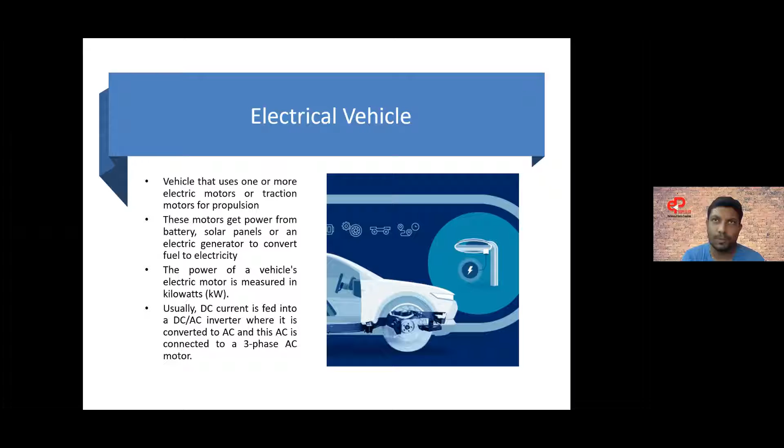Advantages of electrical vehicles over conventional vehicles: we all know that the initial cost is very high in EV vehicles, but the running and maintenance cost is very low compared to ordinary IC engine based vehicles. They are pollution free, because we have no IC engine carbon CO2 emission, so pollution free. That's the main advantage of going for EV applications.

We are able to integrate with renewable energy sources - battery is possible, solar panel is also possible. That's a benefit of EV. Eco-friendly materials - that means reusable materials we are able to use in EV vehicles. That's the advantage, it's eco-friendly. Health benefits - no pollution, no CO2. That's a benefit to society as well.

Safety improvements - compared to IC based vehicles, we are able to integrate more sensors in EV applications. That's a major advantage of EV vehicles, these safety improvements, for our energy society.

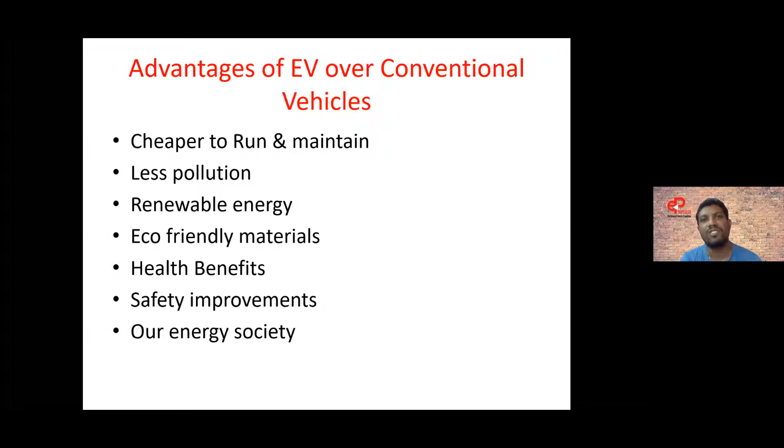We know that petrol price today is approximately 97 rupees. Maybe in the next one week it will reach 100 rupees or more. So our country is still having a major issue with fuel crisis. So if you go with EV applications, there are benefits for our energy society, meaning economic benefits are also there. That's what we mean by energy society.

This is the current status of EV all over the world. If you want to know about the global EV status, you can refer to the IEA, International Energy Agency, website. This is the first chart - you see electric vehicles all over the world in different transportation modes for different countries.

This shows how it's growing across different countries - China, Europe, United States are the major contributors. Out of all countries, China is the major contributor. You see the blue one, that's China, they are contributing more. They are the heart of EV vehicles because even today, 90% of motors used in EV applications all over the world are bought from China, because their raw materials are available at low cost.

Production cost and labor cost are also very low there, so we are able to get low cost motors. Then here you see another chart of how many cars were sold in 2020. Here in China, battery operated vehicles and plug-in hybrid electric vehicles are occupying more space in this chart in 2020, still continuously increasing compared to other countries. So from this chart itself, you know China is the major contributor for electric vehicles.

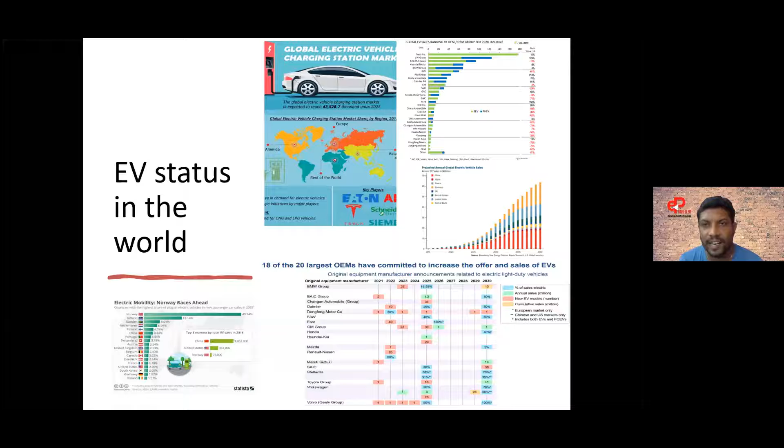This is the last chart - out of all countries, Norway right now is using the most electric vehicles in their country. Compared to Iceland, Sweden, China and other countries, even though their production and population is less, they are using nearly 49% electric vehicles on their roadsides.

The familiar three-wheeler EV in India - Ape is one of the major three-wheeler OEMs, they are producing electric vehicle based three-wheelers.

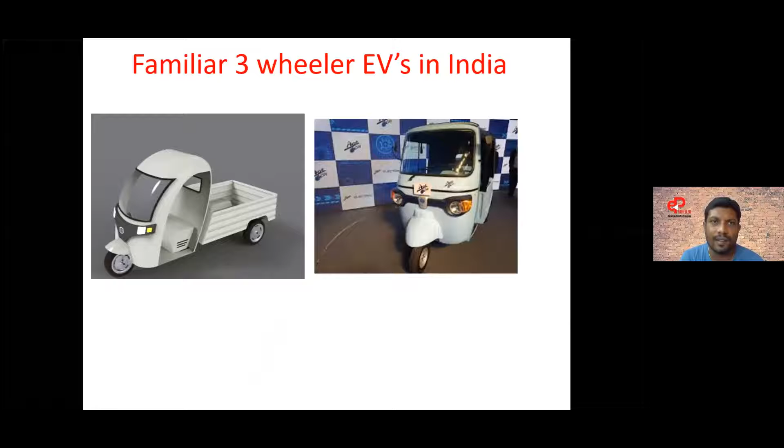This is the electrical vehicle status in India up to today morning. If you go and visit a particular website, I will give that link, there you are able to see how many vehicles are sold every day across different states.

Right now 75,000 vehicles sold all over India. In Tamil Nadu, 11,592 vehicles already available. Karnataka, 17,021 vehicles already sold. Kerala, 1,712. The remaining states have different numbers based on their original registration. Because however many vehicles are sold daily, they register on this website, so automatically you are able to know the counts.

Here you see this many vehicles sold, fuel saved in liters per day, carbon dioxide reduction in kilograms, every day and every year. This is the benefit we are able to see on this website.

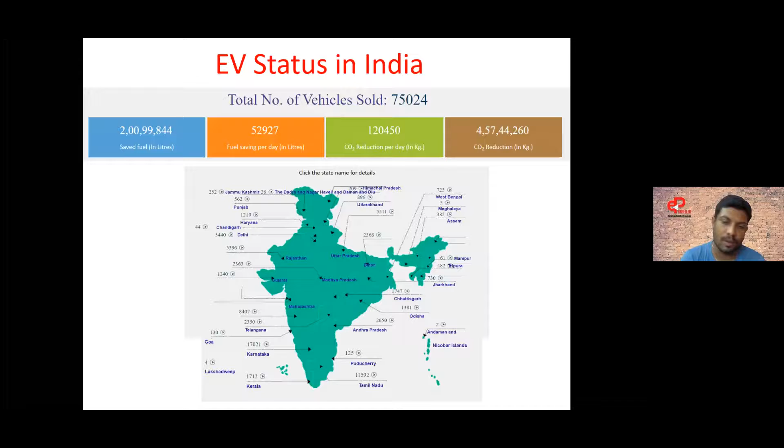So for current EV status in India, different states are giving tax benefits. This is the IC engine based vehicle tax, and this is the electrical vehicle tax. In Delhi, there is no tax for electrical vehicles, but IC engines get an 8% tax. But in Tamil Nadu, it's 4% tax for electrical vehicles, 12% tax for IC engine based vehicles.

This is the comparison if you go with electrical vehicle versus petrol engine. In electrical vehicles we have two versions: lithium-ion based and lead acid based vehicles. Compared to petrol, here we have more benefits.

Ex-showroom price is high, but you see, for 50 km per day we are able to run. Here 1 liter of petrol is required, here 1.5 units are required. Cost here is 11 rupees, here 60 rupees... now it's 96 rupees.

Running for a 5-year product future prediction, 75,000 km from here to here. You see savings in 5 years of nearly this much amount. We are spending nearly 1,75,000, here 1,13,000, here 91,000. Carbon dioxide is reduced in both electrical cases, but with petrol it is not possible.

If you want to know brief details about the EV market in India, refer to these websites: FAME2, SMEV - Society of Manufacturers of Electrical Vehicles, and ARAI India. ARAI India is our government authorized website. FAME2, if you want to know what standards and testing procedures are used in India, refer to FAME2 - everything is given there.

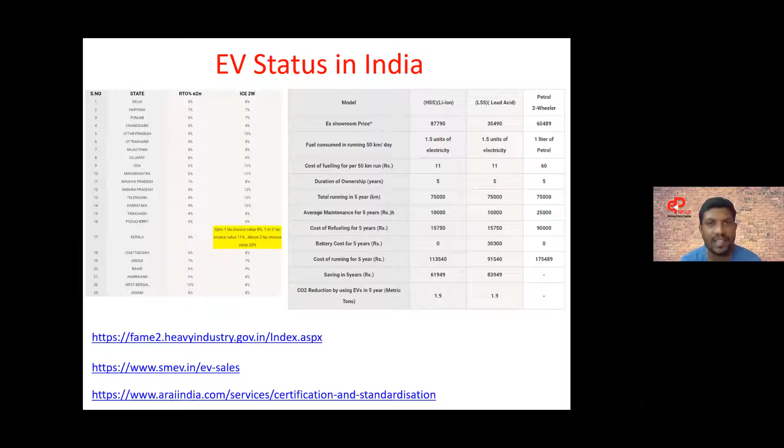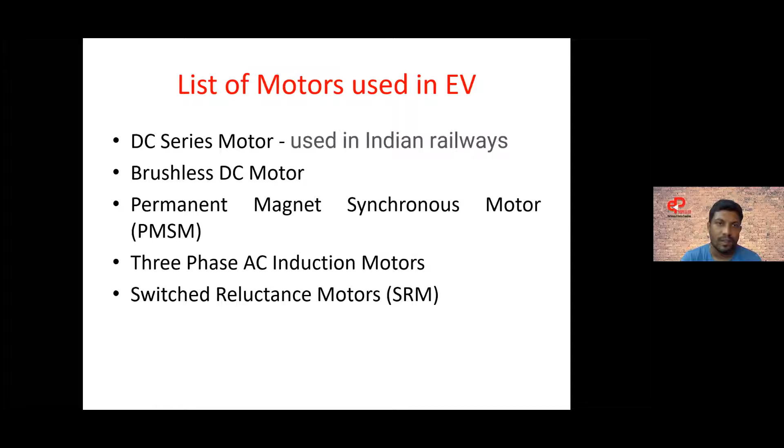Then I'll go with another 4 motors: brushless DC motor, PMSM, 3-phase AC induction motor, and SRM, switched reluctance motor. We are going to discuss briefly about these 4 motors. I am talking only from an industrial point of view, not about basic characteristics or other applications.

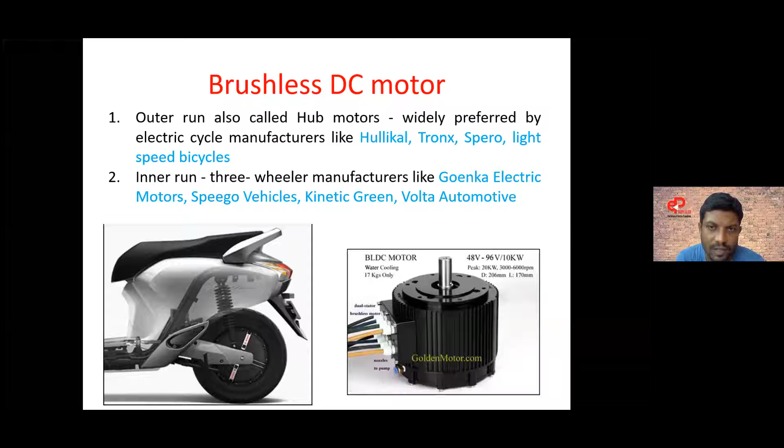Inner run motor means rotor inside, stator outside. In the outer run, rotor is outside, stator is inside. That's why it's called inner and outer run rotor. This inner run rotor is suitable for 3-wheeler applications. Goenka electric motors, Piaggio, Ape, they are using this type of BLDC motor. The problem with BLDC motor is it's suitable only for low power, low speed applications, not suitable for high power applications.

Then permanent magnet synchronous motor. The difference between PMSM and brushless DC motor: here air gap flux linkage is sinusoidal in nature, but in BLDC it is trapezoidal in nature. Both machines have the same construction, but because of their motor winding distribution, this motor has sinusoidal back EMF in the air gap. That's the advantage of this one.

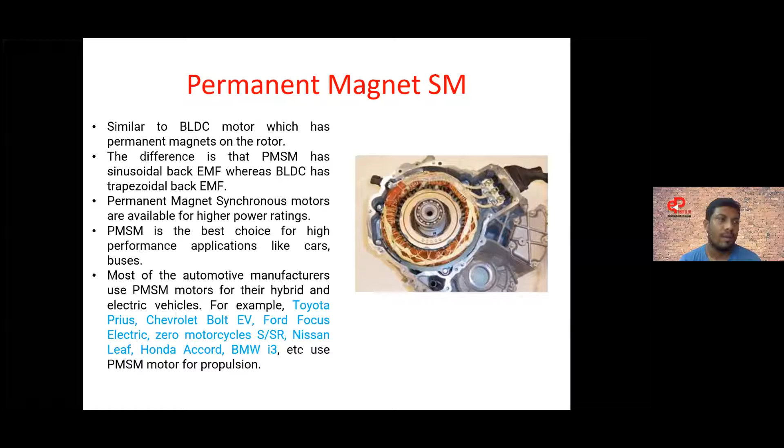This motor is suitable for high speed, medium speed, and high power applications. This is the best choice for 4-wheelers and buses, like Volvo buses, which use permanent magnet synchronous motors only. Brands like Toyota Prius, Chevrolet, Ford, Mercedes, Nissan Leaf, Honda Accord, BMW i3 are currently using this motor. Out of 100 electric vehicles, 80-90% use only permanent magnet synchronous motor. It is the best choice of motor used for EV applications.

Three-phase induction motor, it's an old motor but still suitable for industrial EV applications. In induction motors, you know there's slip ring and squirrel cage. For high torque application we always prefer slip ring, but in industry they prefer only squirrel cage induction motor. Squirrel cage induction motor has no high starting torque, but with V/F control, which you already studied in solid state drives and special electrical machines, V/F control and field oriented control based three-phase induction motors can achieve high starting torque. The benefit of the three-phase induction motor is we can get 92 to 95% efficiency.

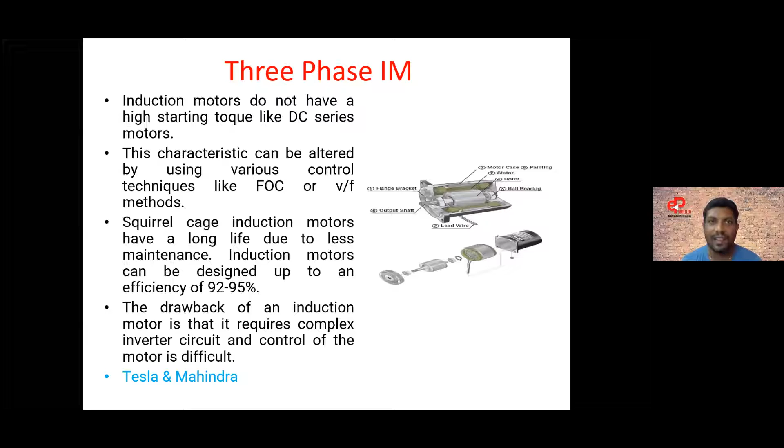But the problem is controller complexity, that's a major issue. Currently the top manufacturer in the world for EV, Tesla, uses only three-phase induction motor in their electrical vehicles. Mahindra also uses a three-phase induction motor.

Final one is switched reluctance motor. Simple in construction compared to PMSM, it's a simple one. But the problem is it's able to operate only in closed loop, so the converter circuit with the controller is complicated. It is suitable only for high-speed applications. Still, this motor for EV application is only at research level, not really implemented in many industries. In future, maybe PMSM and induction motor will be replaced with SR. Currently, much research is going on in different industries replacing conventional motors with SR.

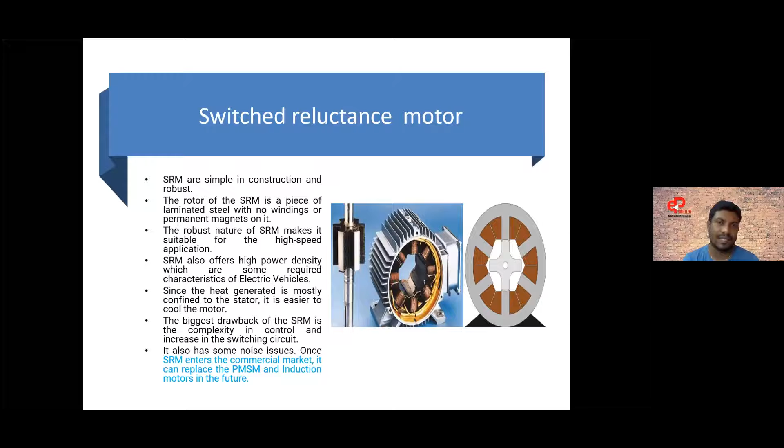Then, if you want to select any motor for EV application, you need to consider these factors. First, vehicle characteristics - whether it's a battery type vehicle, fuel plus battery, or solar integrated. Then driving cycles - whether you're going to operate that vehicle in high-speed operation, flat surface, hill station, or rough surface, you select accordingly.

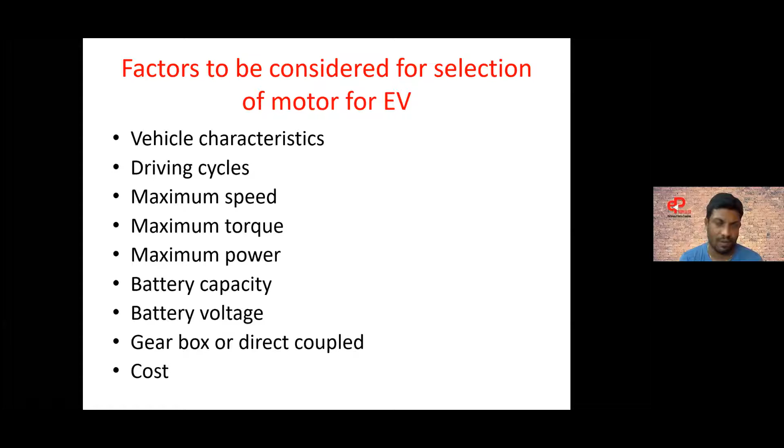Maximum speed of the vehicle, maximum torque and power required, battery capacity - very very important - battery voltage. Based on battery capacity, you select the number of cells with battery voltage. Gearbox - few require direct coupled, few require shaft coupled, so gearbox is required. Cost is very very important for motors. That's why our country, and not only our country, all depend on China for motor purchasing, because their cost is very very less.

If you want, you can go and see these websites, Yasa Motors and T Motor. You are able to get some idea because they have given some test results on their websites. So definitely you are able to get some idea about these.

Up to this, I gave only the basics of electrical vehicles - what are all the motors used in electrical vehicles. It's a basic theory. Now I move to design of electrical machines.

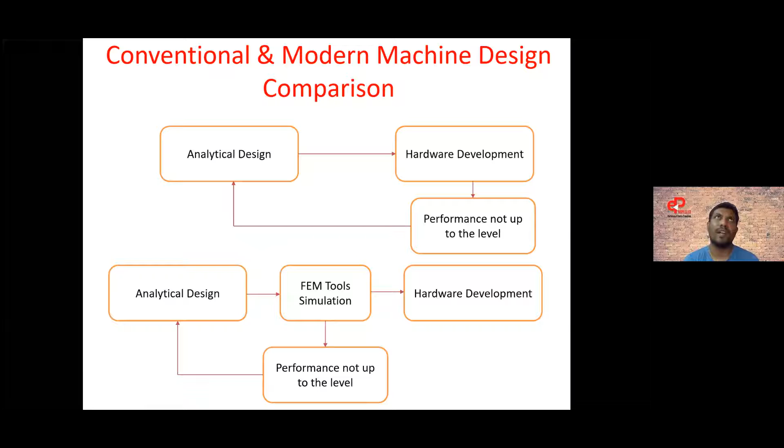So now I introduce a new concept: FEM, finite element method or finite element analysis. If you are a mechanical engineer, you have one special paper in your domain on finite element analysis. But if you are EEE, you don't have this paper specially. If you study for ME, Master of Engineering, there's a paper called electromagnetic analysis of electrical machines, and in that paper you are able to study FEM.

History of FEA - it's approximate analysis, finite element analysis is approximate analysis. Ray Clough, R.W. Clough, was the first scientist/electrical engineer to introduce a finite element analysis problem in elasticity applications. He published his first paper in 1956, 'Stiffness and Deflection Analysis of Complex Structures.'

For electrical motor applications, Silvester was the first man to carry out electrical machine motor analysis in FEA in the 1970s. He wrote one book - if you want to know about finite element analysis briefly, go and refer to this book: 'Finite Elements for Electrical Engineers' by P. Silvester.

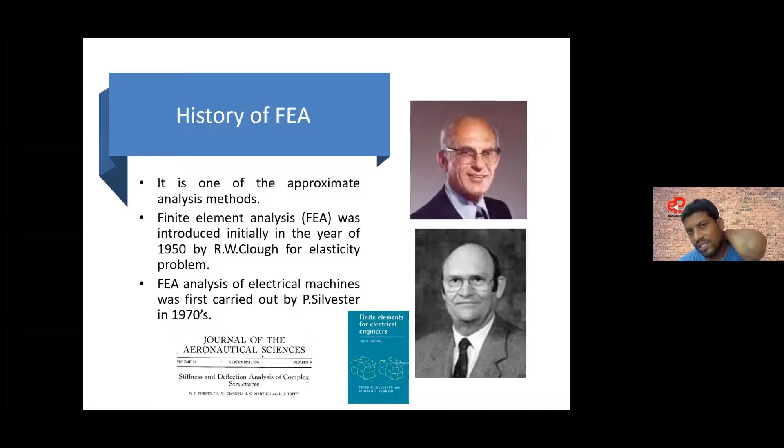Both are considered fathers of finite element analysis. In 1950, Clough introduced finite element analysis. But actually, in 1870 itself this concept was introduced, under a different name: trial function, finite difference method, weighted residual method, piecewise trial function, direct continuum analysis, variational finite difference method. Present day it's called finite element method.

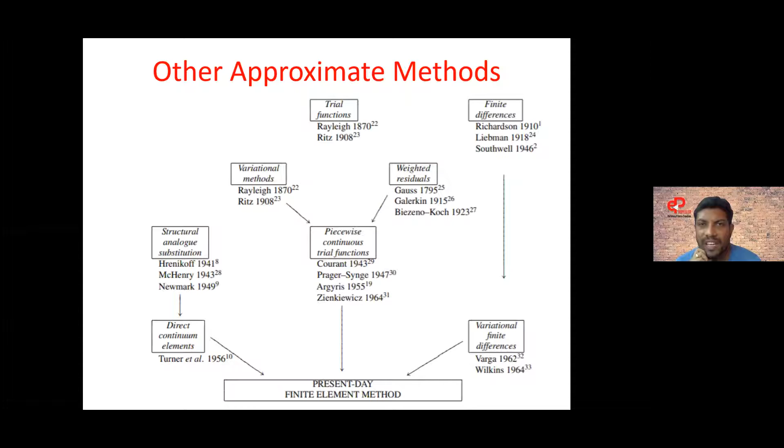If you are a mechanical engineer, ask any of your friends about this. One familiar software in mechanical engineering, ANSYS, comes under FEM. Those working in MagNet software or other software for the EC department also use a finite element analysis software. Each department has different software under this finite element analysis concept.

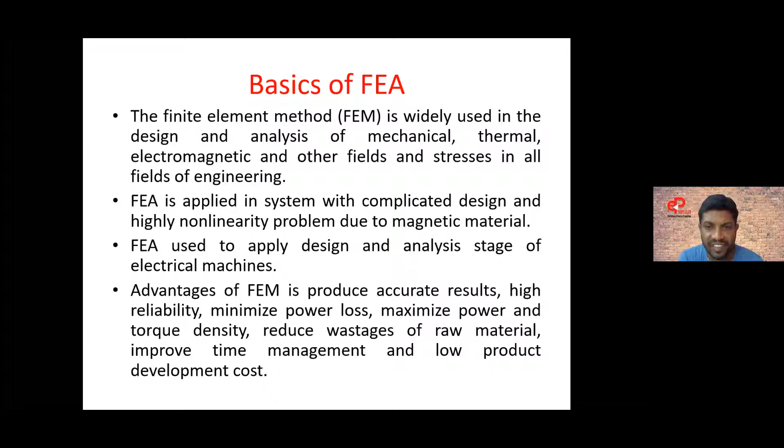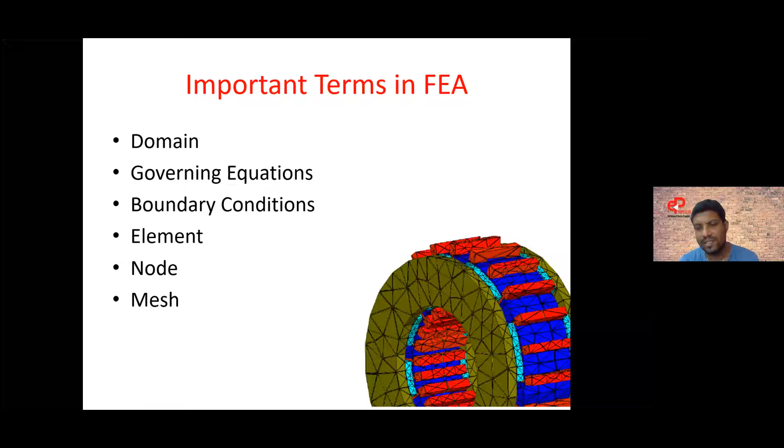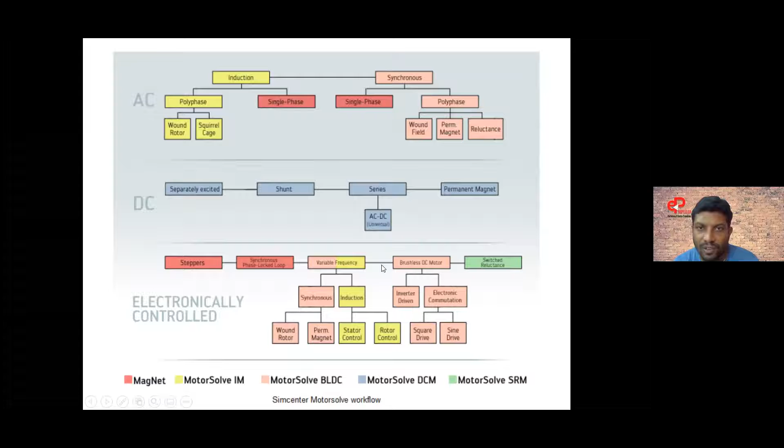If you want to work on single phase motors, buy this software, MagNet. If you want to design synchronous motors or permanent magnet motors, refer to Motor Solve BLDC. If you want to design a DC motor, buy MotorSolve DCM. SRM means Motor Solve SRM.

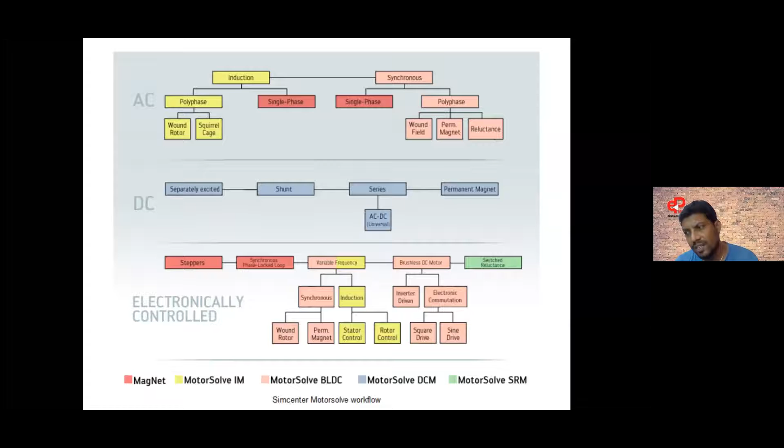Each software costs around 12 to 13 lakhs. If you are an educational institution and want to buy any software, you can get it at a reasonable price. If you want to develop your own research centers in your college, you can try buying these softwares, as they offer good prices.

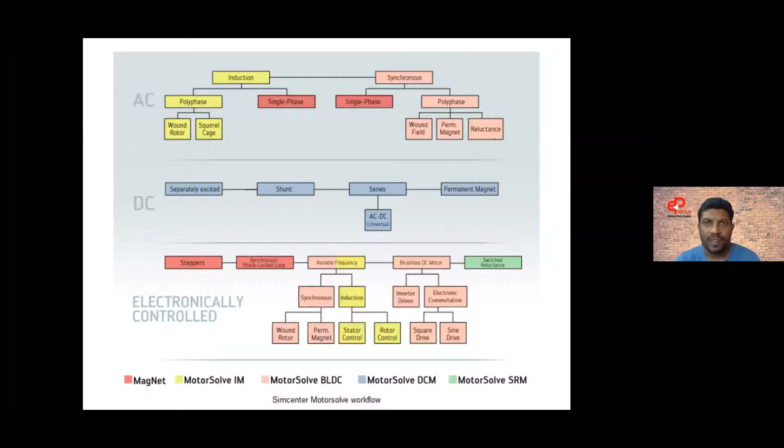A particular software can only be used for a particular motor; not all motors can be used in the same software. Different software means different analysis. Now I'll move to a brief explanation about the software.

You also need to give losses — I'm not giving the losses here, but you need to give the frictional and windage losses. Normally 7% of output power is called mechanical losses.

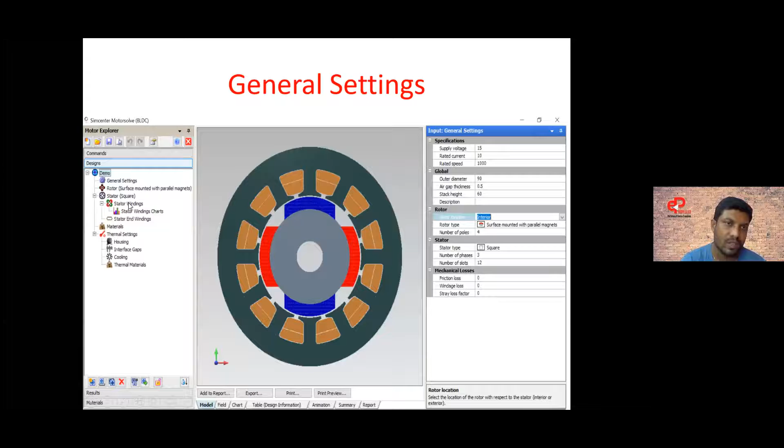Then comes stator windings, where you give details like number of windings used, number of turns, number of parallel wires, whether it's a lap winding or wave winding, and the insulation thickness of the wire. You need to give all these details in the stator winding part. So general settings, rotor, stator, and stator windings are all required.

Next, you move directly to materials. For the core, which type of material do you want to use — silicon steel, M235, cold roll steel? These materials are normally used in industry. For the magnet, you know neodymium iron boron material, samarium cobalt, and ferrite magnets are available. Normally for wire we use copper. Here you also have thermal settings.

Thermal settings, you want to give temperature. What is the surrounding temperature of that motor? That is operating temperature of that motor. That's the thing you want to give in thermal settings.

Okay, these are all the major setups you want to do in general settings, sorry, motor settings. If you open the software, if you are able to get a crack version, you open the software, you need to use, you are able to see this page, you need to give these details. Based on your requirement, you select it.

Once you design the motor, here you see bottom results is there. You go on results, click PWM analysis, you are able to get these results, torque and output power. Just for example, I show the results, okay, because we have only tested results only. I'm not able to show the results.

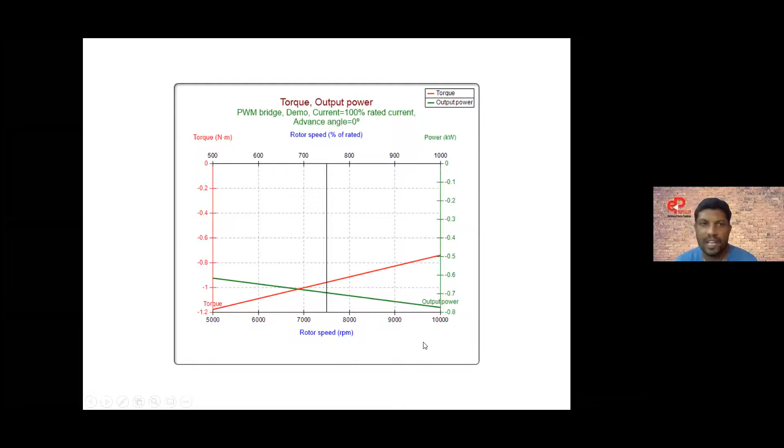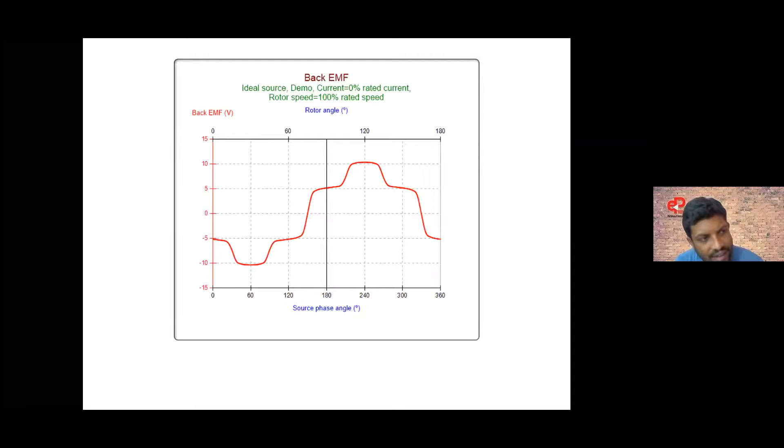So back EMF, you know that back EMF developed at the rotor. Okay, so back EMF, how much developed? How much developed in that rotor? That can be identified with the help of these characteristics. Normally, it should be in pure sinusoidal waveform. For explanation purpose, I use this waveform. Okay, back EMF, you already studied it. EMF developed at the armature is called back EMF. We said no, okay, that is induced EMF.

These are all the results. Okay, this is the only design. Okay, these are all the results you are able to get in that software.

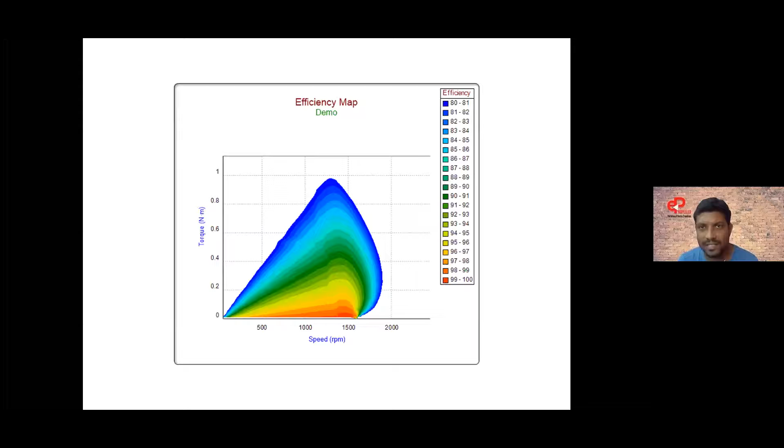As in the industry, I know if I am the customer, I want to buy this motor. I know what is the efficiency of this motor based on these characteristics. If I want higher efficiency at this point, means engineers working based on their efficiency requirement at lower RPM. So that's why this software tool is very much used for designers for industrial application.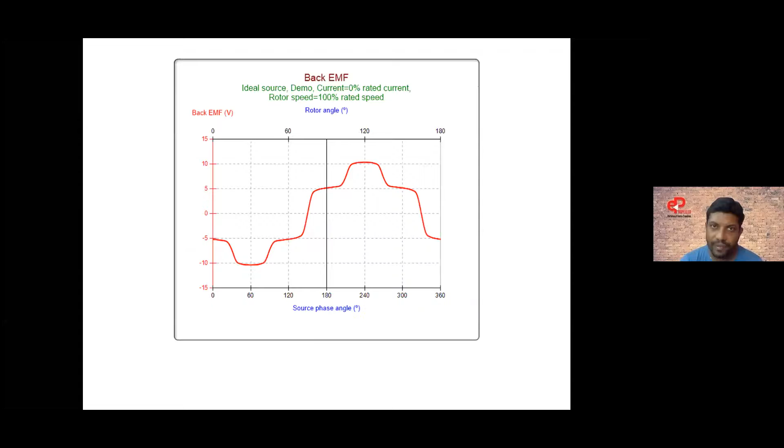If you are designing an electrical vehicle like a two-wheeler or three-wheeler, starting time it required more torque. So you give more in first 5 seconds, give 200% torque. Next 1 hour, I will give 100% torque. Next 1 hour, I will give 50% torque. You are able to see the temperature for different time durations. That is the benefit you are able to get in this software.

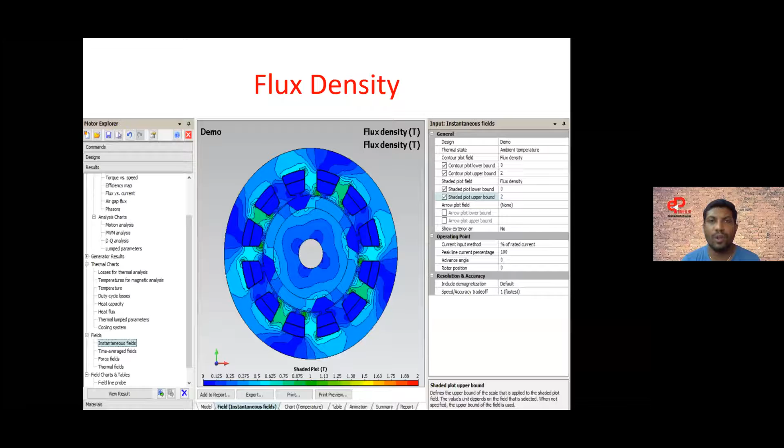This is our conclusion, so the machine is good. If you want to optimize anything, we optimize further based on our customer requirement. This is the way we are going to design a motor in software for any industrial requirement.

So final one is demagnetization. Demagnetization means you want to find the maximum operating temperature of the demagnetizing motor because we have permanent magnets. If you go to instantaneous field, here you have an option for demagnetization prediction. If you put this option and give 100% of current, you are able to find whether it's demagnetized or not.

Demagnetization means it shows definitely at some point the magnet is demagnetized. Here you see speed and accuracy. I give you here 1. If you want more accurate results, you use 7, 10, like that.

Okay, this is the fundamental of MotorSolve software.

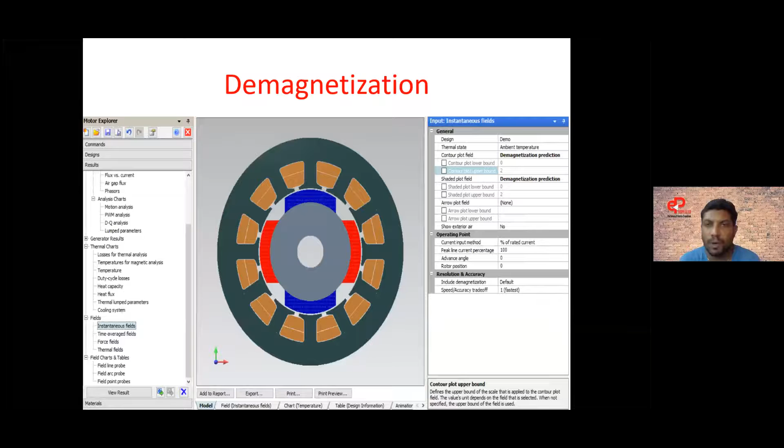See, MotorSolve is not only available for surface mounted type. Whatever we discussed in this model is surface mounted type permanent magnet synchronous motor. Other types are also available in their library: surface inset, spoke type, wheel spoke type, V type magnets, U type magnets. We have this much opportunity in that software.

If you want to design any one of the motors, each rotor has different applications and its own advantages. You will see in many papers, they are giving this much design already in their papers. Okay, up to this, I conclude this software.

From this itself, you know that if you want to do any final year project or publish any papers, you are able to get these much results. This is enough to write a paper on this particular topic. Take cogging torque minimization, demagnetization improvement, or saturation. Try to find in material science different materials for core, winding, combination of two materials used in windings, air gap optimization, optimization of the motor. These are all research problems available in this area.

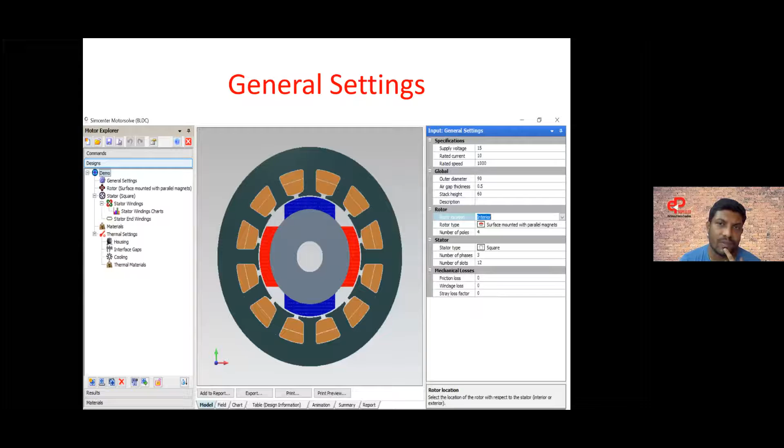Okay, EV applications - don't think only in power electronics, come and apply your knowledge in machine design. As faculty members, guide your students to learn one of the software. That is very much useful for your students for getting a job in core companies.

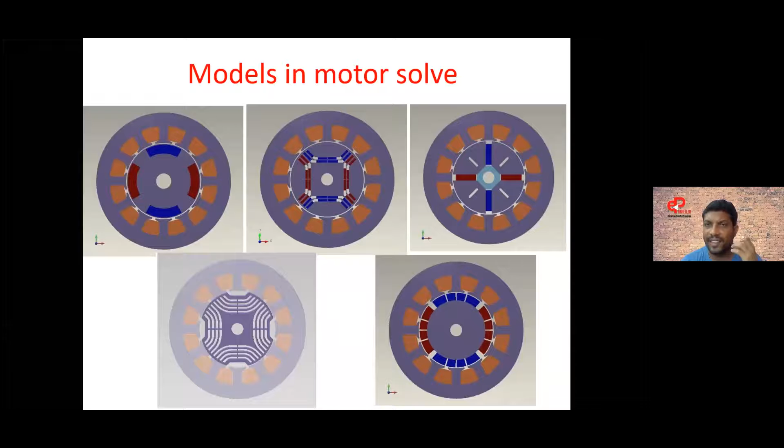This is two softwares. One software we discussed, this is a template software, all the things available in that software library itself, like MATLAB. Now I move to CAD software, Magnet software. I think some of you are familiar. Those who have completed a master's degree in Anna University know about this software, because in Anna University CEG campus, some faculty members continuously advised students to do their projects in machine design.

So this is a web page. It's a CAD software - CAD software means you need to draw the motor. There are no pre-built options available, so you need to draw the motor, apply the material, create the windings, all yourself based on your knowledge. That's why I said help topics are available in that software library itself, so you go and refer to that help. Definitely you are able to design a machine.

Take 1 month to design only a small motor. After that, you will get good knowledge in the software, then you go to a higher level. That is the initial way - as a learner, try to study briefly about the help topics based on their instructions to design a motor.

Again, it's also suitable for electrical machines and special electrical machines. Coupled analysis is possible - you see here coupled analysis. Magnet, you are able to integrate with Simulink, PSIM, MATLAB also is possible. MotorSolve also we are able to couple with Magnet.

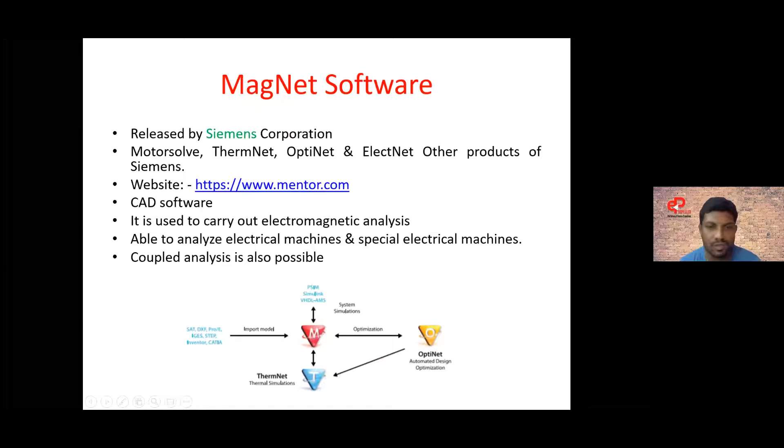This is the application of Magnet software. It's applicable in generators, motors, transformers. If you are interested to do research in transformers, you can refer to this software. Also actuators, sensors, induction heating, loudspeakers, magnetic levitation, and medical instruments.

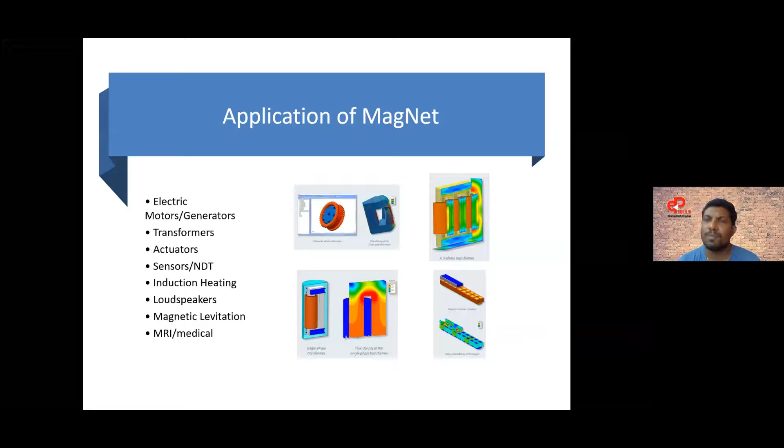Those attending the electronics and communication department may know about COMSOL Multiphysics software. I think they use it for image processing, and that software also comes under FEM analysis. In embedded systems, for IC designs and all, they also use COMSOL software, which also comes under FEM software.

What are all the analyses possible in Magnet? Transient analysis, that means time varying - when the motor is starting to stopping, starting to maximum position, 0 to maximum position, sudden torque improvement, load applying condition - that is called transients. Motion analysis is also possible: when the motor is going to rotate, what is the performance? We are able to see that in Magnet.

Harmonics issue - if the motor definitely has some harmonics, that is another research area: analysis of harmonics in motor windings. That is another study, and that is also possible in this software.

Then finally, magnetostatics - what is the flux linkage, what is the flux density? Study about only magnetic parameters, that is called magnetostatics. Now, the important terms in magnet software.

Meshing - I said that a complicated structure is divided into small regions, that is meshing. Boundary conditions are compulsorily required. Then transient parameters: what is the starting speed, what is the maximum speed?

Coil design is very, very important. You give proper connection, then only the motor operates at the expected level. If coil design is not good, it's a faulty one. It's single layer winding, double layer winding, distributed winding, concentrated winding - these things you need to analyze very clearly.

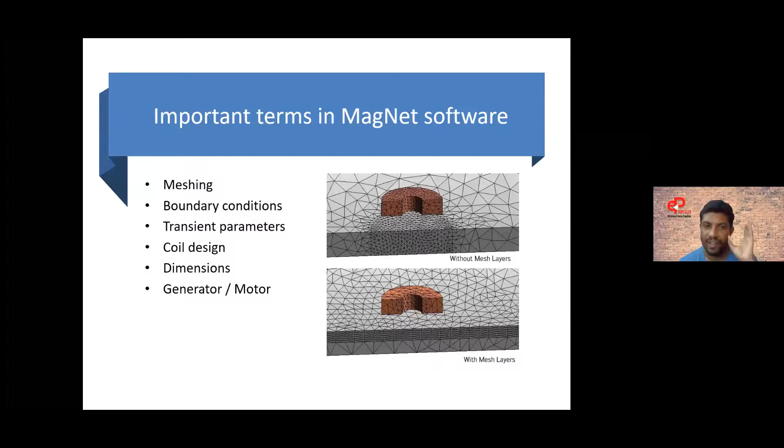If you want to design any motor in software, TJ Miller suggested a slot pole combination. In the industry, we select the slot pole combination based on this chart. One paper published by TJ Miller gives the right slot pole combination. It's not simply 2 poles, 4 poles - we have machines up to 80 poles.

For high speed applications, we go with high pole applications. Low weight machine means high slot pole is good. Here you see some winding factor is 0.95 - where we have 0.95, that is a good slot pole combination.

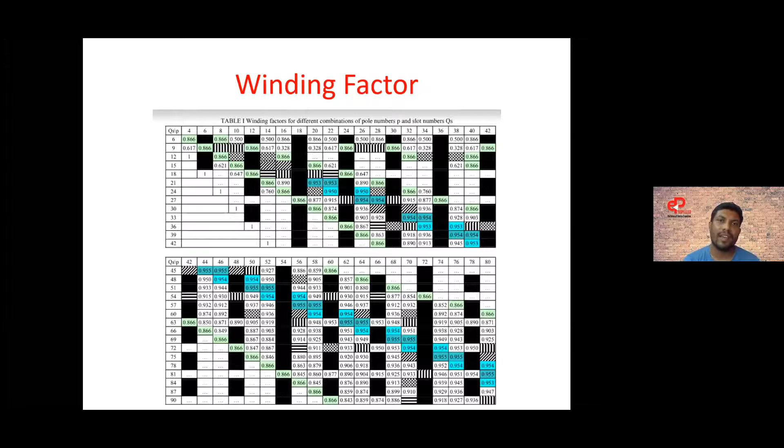Here you see 24-26, 24-22, 34-36, 38-36 - these are all good slot pole combinations suggested by TJ Miller. He is an expert in permanent magnet machine design. Based on his experiments, he gave this winding factor chart in one of his publications.

Procedure to create a model using MagNet software: like Motorsolve and MATLAB, in MagNet also we have three different processes - pre-processor, processor, post-processor. Pre-processor means you create the model using a CAD model, you draw the circuit, build the model based on the dimensions. Like in MATLAB, you take the blocks - source, 3-phase rectifier, load - and connect everything. That process is called the pre-processor.

Then the processor - processor means you solve the model, same as running the model in MATLAB. Then post-processor: in MATLAB you get the results and see them graphically, that is called post-processor here. In post-processor, you are able to see results like flux density, whatever results we got previously - these things we see only in the post-processor steps.

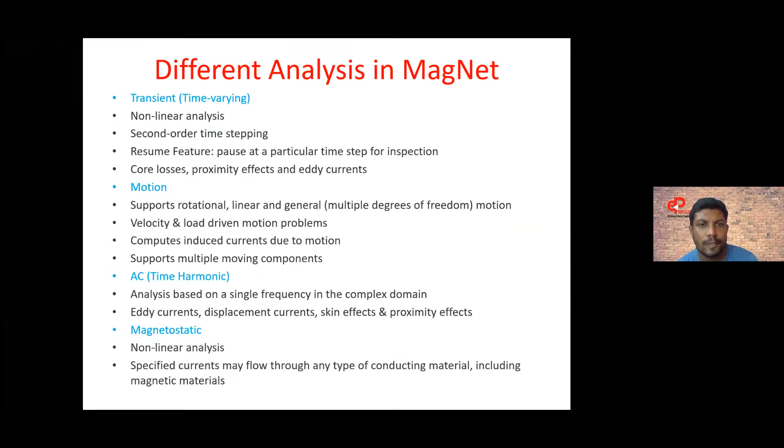These are all the important steps followed in the MagNet software. Again, I say that you go and refer to the help topic in MagNet software, there you are able to see these processes.

Someone, Chitra, can you mute yourself?

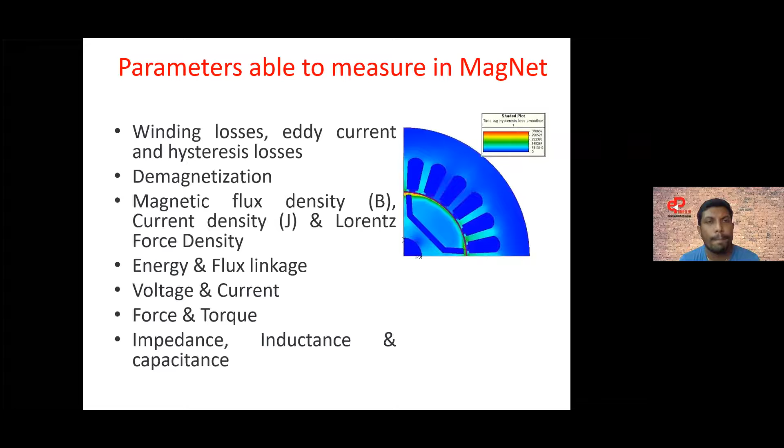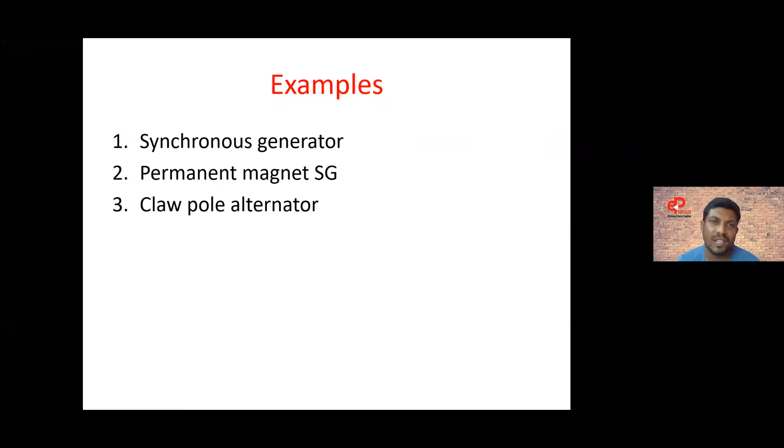I move to some examples of motors designed in this MagNet software. A few I already designed in my research work. Just I want to show a few results. So one of the things I designed in my research work is a synchronous generator.

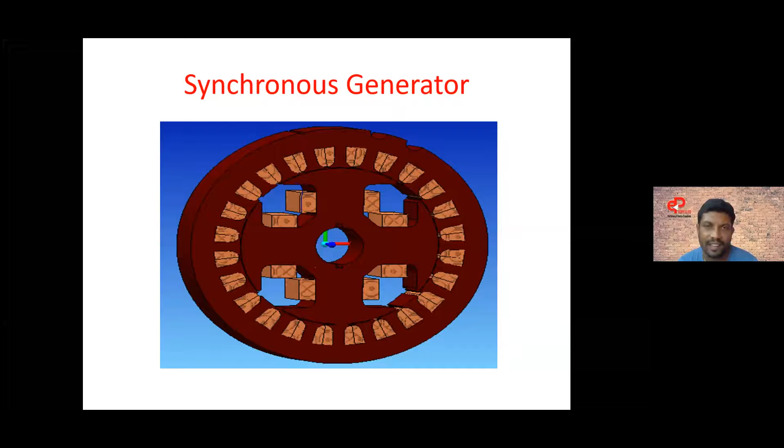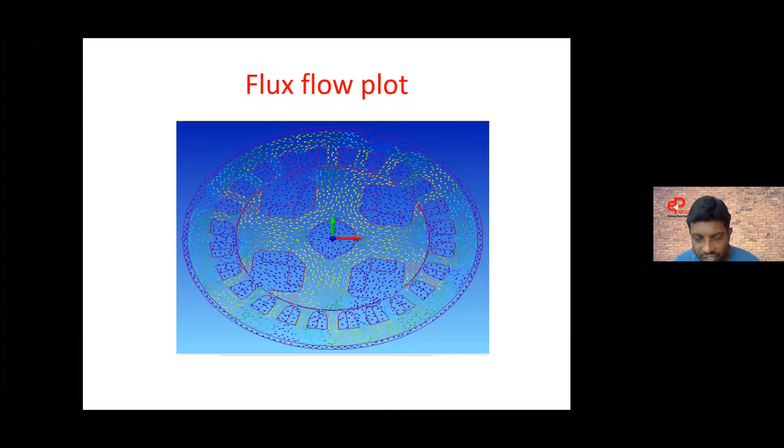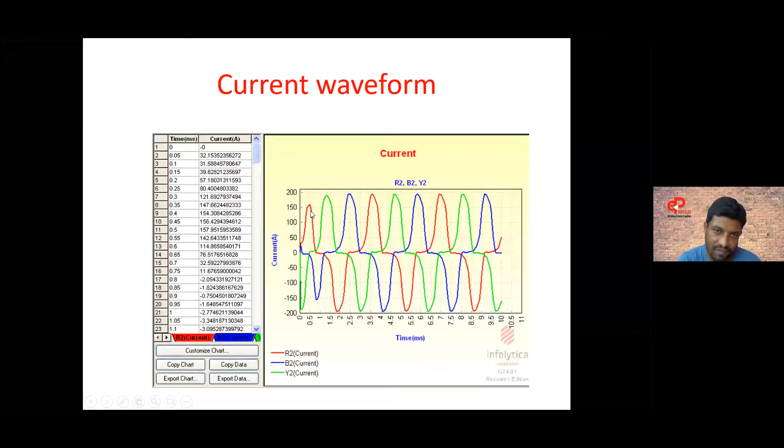Here, waveform - like MATLAB, you are able to see the waveform. My motor is a 5 kilowatt machine, 180 amps. So you see here sinusoidal waveform. It's a 3-phase waveform. 180 amps is the maximum value.

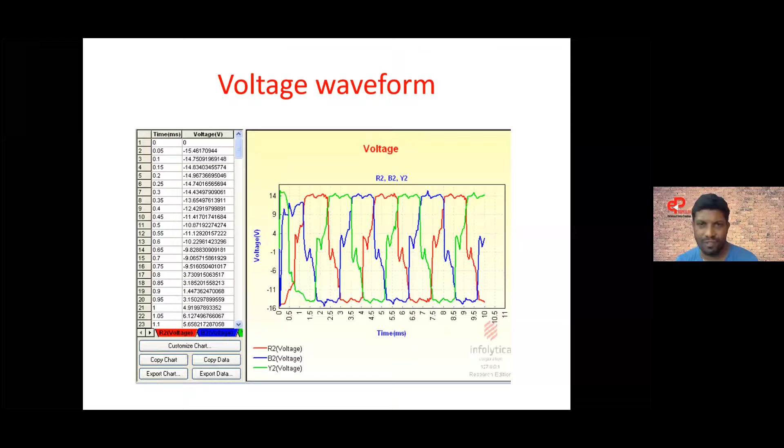This is the voltage waveform. My machine is 28 volts, peak to peak voltage is 28 volts. Again we have some distortion. This is not power electronics software, it's a motor design software. I don't have that much filter options, that's why we are getting some distortions.

I already said my motor is suitable for automobile application. So up to the armature, the generator armature produces AC, but in output I want DC. So I have windings here, connected to a rotating rectifier. That rectifier output is connected to load, a resistive load. These options are available in magnet software itself.

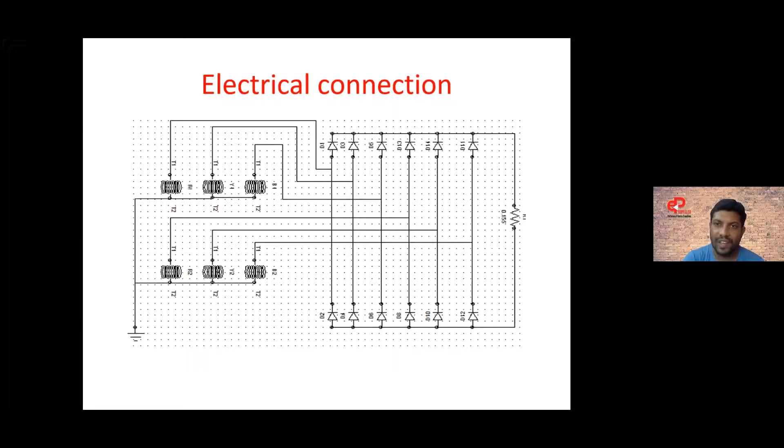Then, with the results of magnet software coupled to thermal software, I am able to get temperature like this. Here you see what is the maximum temperature - maximum temperature is 25 degrees Celsius, that is in the outer part on windings. Winding temperature is 24, core temperature is 22, and here I have 20 degrees Celsius.

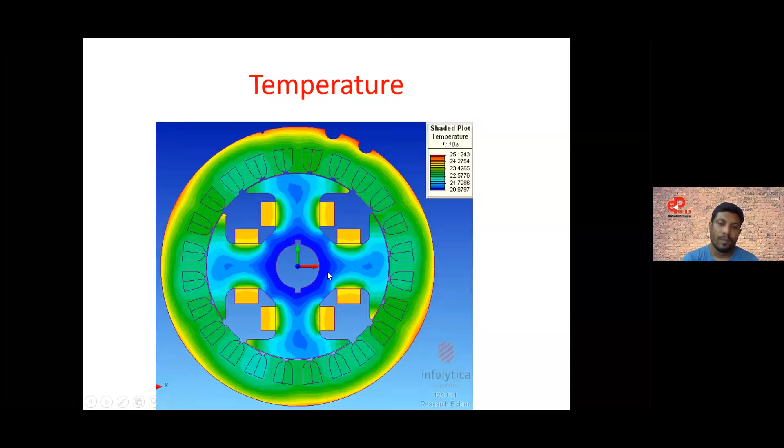Heat flow directions also I am able to find. You know that current is a major source for heat. So here I have coils, heat started to flow, here traveling and reaching the outer part. These are the facilities available in the software.

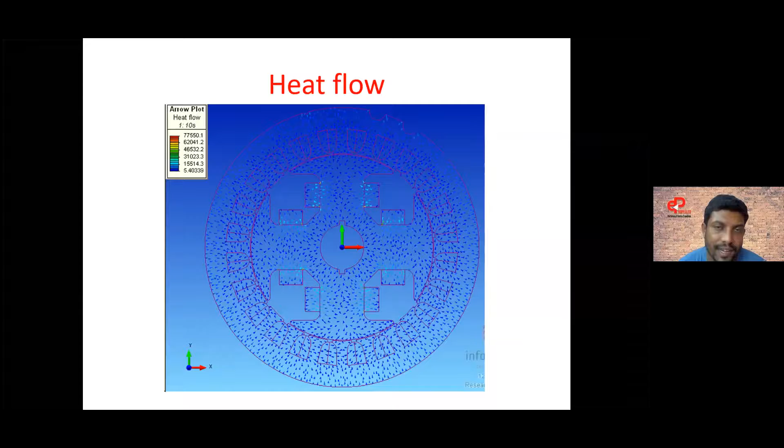These I already published in papers, my research publications. Up to this we discussed about the permanent magnet alternator. Now I move to one design in permanent magnet synchronous motor - this is a surface inset permanent magnet synchronous generator, inner rotor.

Here, this one is magnet, this one is rotor core, and this one is stator core, and this one is coils. Okay, here you are able to see a clear thing.

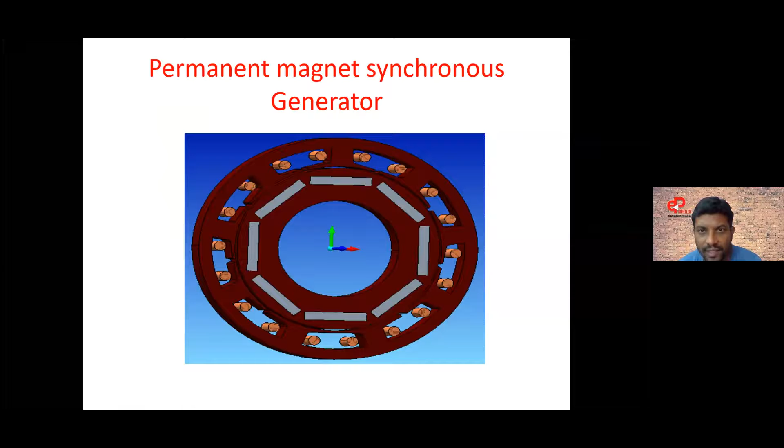Once I designed, I simulated, I got flux density like this. Flux plot, flux density, flux by area. Where we have aligned stator and rotor poles, there I am getting maximum flux density.

When I did the simulation, that time this was coming under Infolytica, that's why it shows Infolytica. Now it's owned by Siemens, so here you have the Siemens symbol.

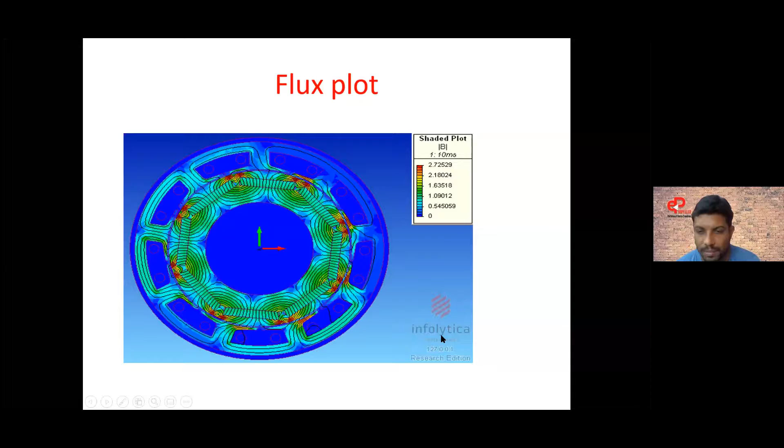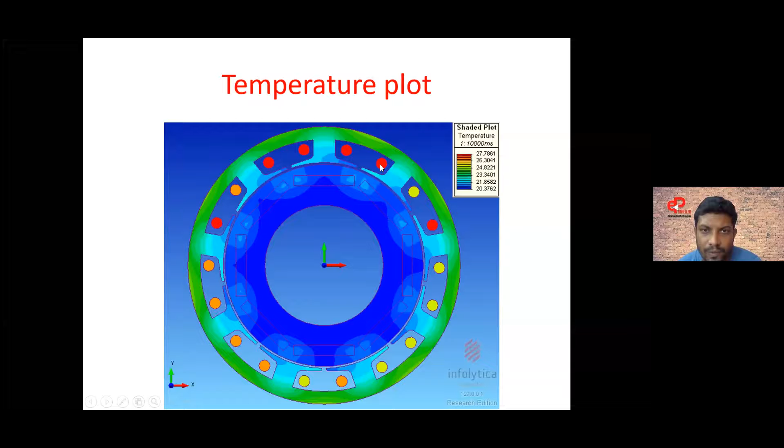Again, I go on with the analysis using the temperature software, ThermNet. Here you are able to see the thermal results. The maximum temperature is at the windings. This is the temperature level, and you are able to see the value.

Finally, this is my implementation in my PhD work, the claw pole alternator. Most of the Volvo buses are using claw pole alternators. Benefit of claw pole machines...

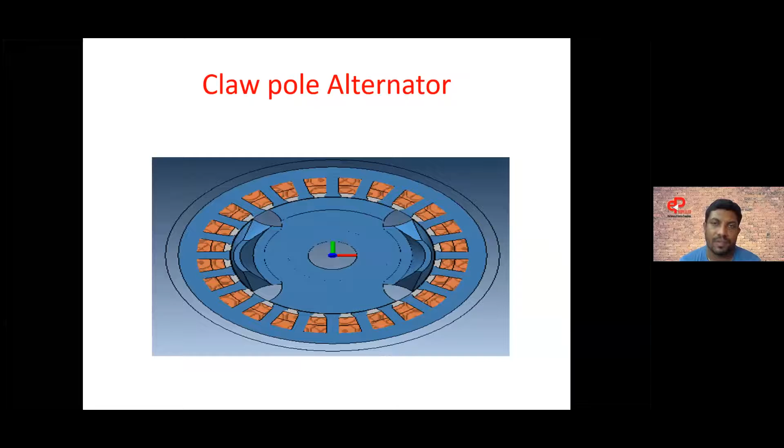Now, this is my design. You see the coil, circular coil. Here airflow is possible. This is the stator, a normal stator.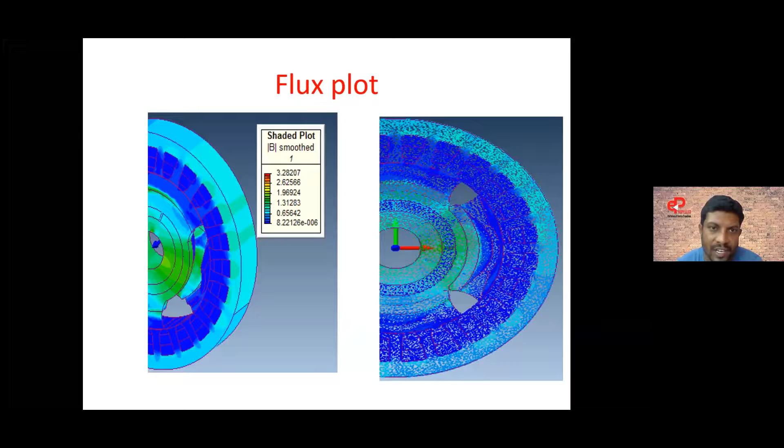I want to show a few things. Up to this point, I have completed 90% of my presentation.

I want to show a few things on this website. Those who are new, if you want to buy any motors, if you are doing projects, you don't need to go to any Ritchie Street or somewhere. If you want to do your own projects for robotic applications, drone applications, or electrical vehicle applications, go and see this new website.

One of the custom suppliers, T-Motor, a very familiar motor manufacturer in China, they are designing all kinds of motors, starting from 5 watts to 5 kilowatt machines.

Here you see multi-rotor, here U type is there, here power type is there. You go and click there, and here you are able to see. I click one motor, here you see.

They are giving some motor details here. The cost is very cheap compared to other motors. What is the specification of that motor? The entire thing they have given on their website itself. If you want to do your projects, you go and take it here.

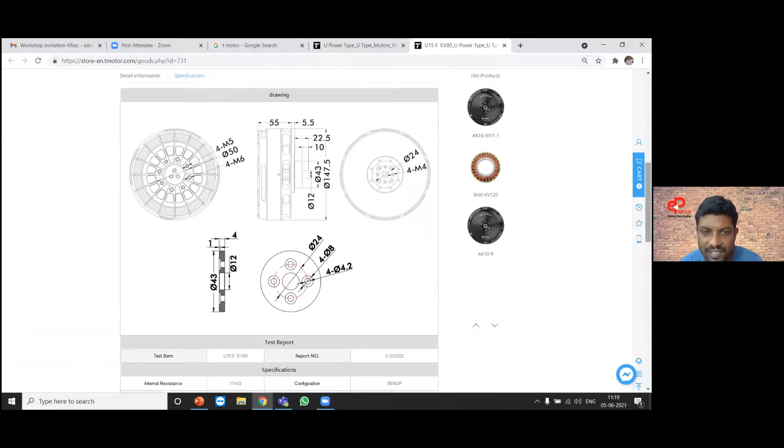Some specifications are there, you choose here. They have given what is the outer rotor, what is the inner rotor, what is the voltage, what is the diameter, what material they used. They have also given the test data.

As an industry, we look at our competitors, what rating they use. We go and visit their website regularly. If you are a student and want to buy any motor, you go and see their website. There are a lot of motors available on these websites, you go and refer to it.

This is one of the motor companies. Then I move to YASA Motor. YASA Motor is a specialist for axial flux machines.

See, they are giving this much amount of torque, 370 Newton meters peak torque, continuous torque is there. They are continuously producing axial flux machines.

As an engineer, the design of an axial flux machine is very complicated. So if you want to design a complicated axial flux machine, you go and refer to this. This is a standard website for axial flux machines.

Here you see, they are giving how to design a machine on the website itself, coil winding methods and all, varnish is there. What are all the test methods available for electrical motors, they are giving on their website itself.

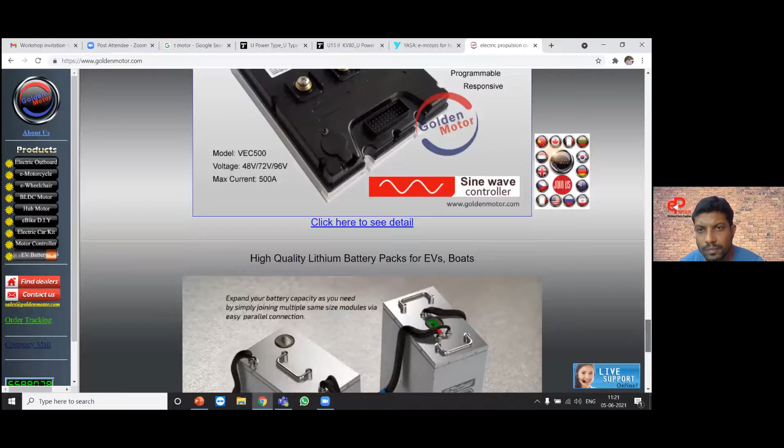Hub motor: the motor is mounted here, wheels directly connected to the motor. If you want their specifications, you click it and automatically you are able to see. Battery packs are also given, here you see.

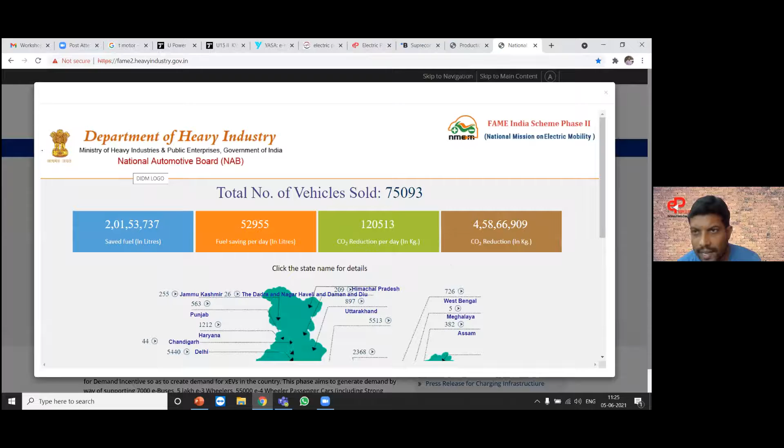are able to get good products in this area. And finally, I want to show the FAME India. Here you go and see, it's the Department of Heavy Industry. You see currently updated vehicles - what are all the vehicles currently sold in the different states.

Here they give some important links - the policy, what is the policy procedure for e-vehicles. Everything is given. If you want to do some projects or start your own startup, you should go and understand these policies. If you are a new OEM and want registration, you go and register here itself.

If you want some government subsidy, they also give some 40 or 30% subsidy available. You go and see their websites, what are all the procedures following on their websites.

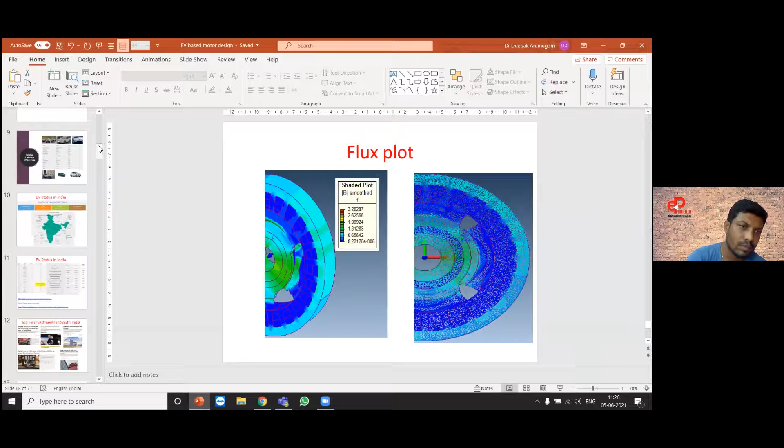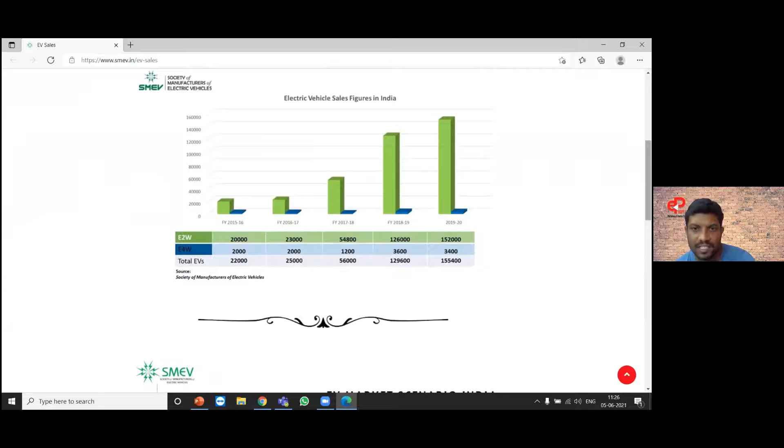And also, yes - the Society of Manufacturers of Electric Vehicles. There you are able to see what are all the electrical two-wheelers sold last year - two-wheeler, four-wheeler. Two-wheeler sales are more compared to four-wheelers.

These things you are able to see in this website itself. If you go to knowledge centers, there are publications available - what are all the current publications available in the EV market. These things you are able to see here itself.

Finally, another important magnet manufacturer - forgot to show this - Arnold Magnetics, a very famous manufacturer for magnets. Here you see they're manufacturing magnets, permanent magnets, different materials. But I want to show permanent magnets here because for electrical motors, permanent magnets are very, very important. Here you see samarium cobalt manufacturing, neodymium iron boron, Alnico magnets, laminated magnets, injection molded magnets.

Rotors, they directly manufacture. Coils also they manufacture. Familiar manufacturer for magnets, Arnold Magnetics - many industries buy their magnets from this company.

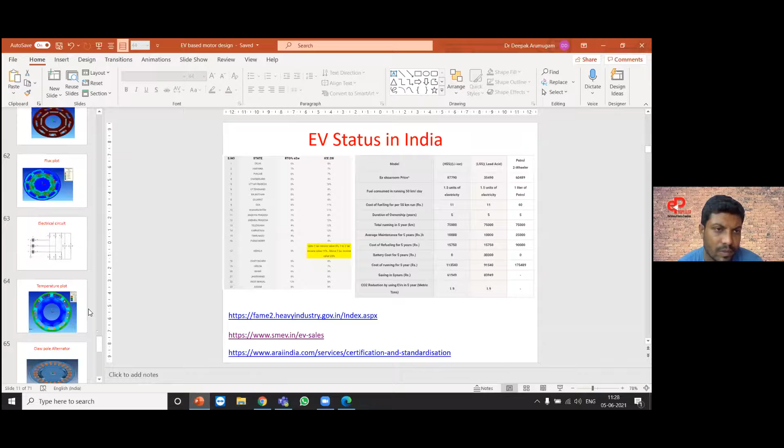After this, I want to come back to my presentation. Up to this, we discussed what is an electrical vehicle, how it's dominating the present world, which countries are dominating the EV industry, companies who are the major contributors to the EV industry, what are all the motors available in EV industry, their benefits, what is the design procedure, what is the industry requirement for electrical motors in EV applications, what are all the different tools available in electrical machine design.

How real-time analytical calculations shifted to simulation, then to hardware. I'm not talking about hardware in this session, but as a learner or beginner, or anybody who is an expert in this area, you are getting some idea about this topic.

We discussed two different topics, two different tools - that is Motor-CAD and Magnet. I showed a few customers, suppliers for motors, the topmost manufacturers in the world, motor manufacturers, and some of the problems in this domain.

Finally, I come to opportunities in FEA - job seekers, the future all over the world, they are concentrating on EV. Those who have 1 or 2 years of experience in this area, machine design area, we have good opportunities - we still have 2 positions opening.